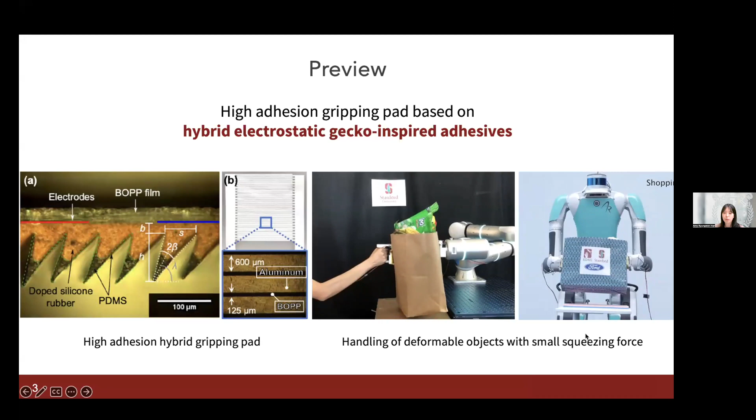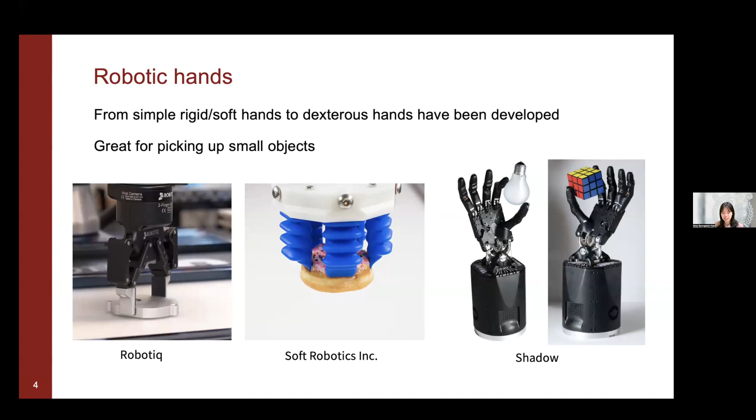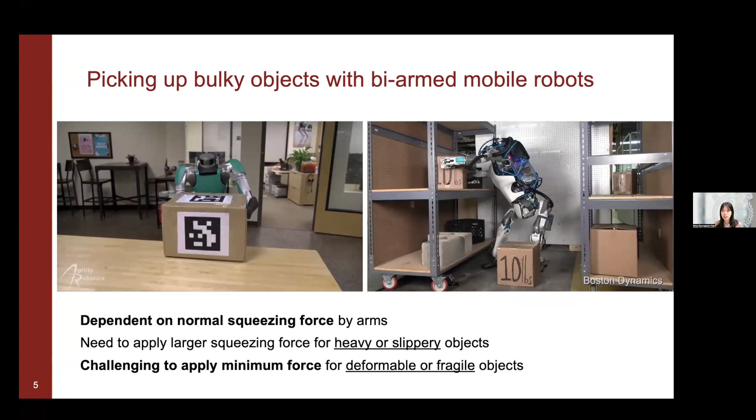There are numerous robotic hands ranging from a simple two-finger gripper to a dexterous hand, great for picking up small objects smaller than their hands. But when mobile robots pick up large objects, they often don't utilize their fingers, instead depending on squeezing force between their arms or palms. They squeeze even more when picking up heavy or slippery objects because they rely on friction, applying normal force to overcome the weight of the object.

If the weight is heavier, you have to apply larger normal force to increase friction. And if the object is slippery, meaning the coefficient of friction is small, you have to apply large normal force to overcome the weight. This means it's challenging to apply small force for picking deformable and fragile objects.

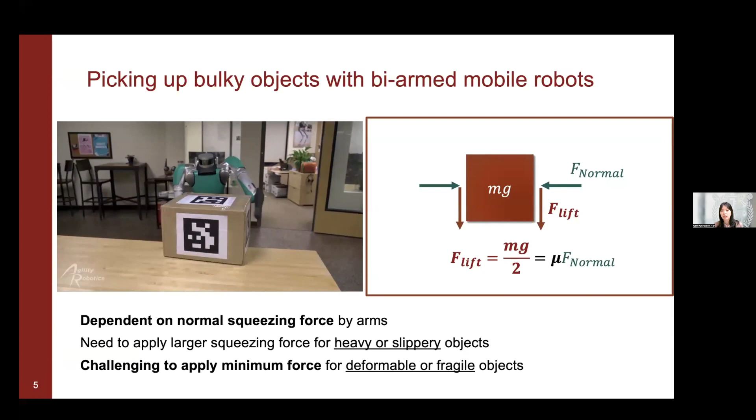So instead of relying on friction, we wanted to rely on adhesion. Our goal was to develop a controllable adhesive pad to reduce the squeezing force in order to handle deformable objects.

There are several solutions for enhancing adhesion. First is to use suction, which performs poorly on porous and rough surfaces, and the system has some weight and complexity. Electrostatic adhesion is more tolerant of surface roughness than suction, but the adhesion it generates is pretty small, meaning there's a limitation to how heavy of an object it can handle.

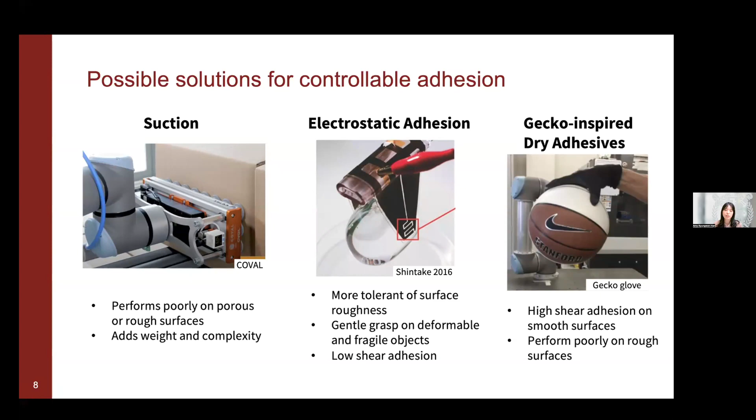Another technology is gecko-inspired dry adhesives. They can provide high shear adhesion on smooth surfaces, but only on smooth surfaces, so if the surface gets a little rough, they perform poorly. Our idea was to combine electrostatic adhesion with gecko-inspired dry adhesives so that the gecko-inspired adhesives also work on rough surfaces.

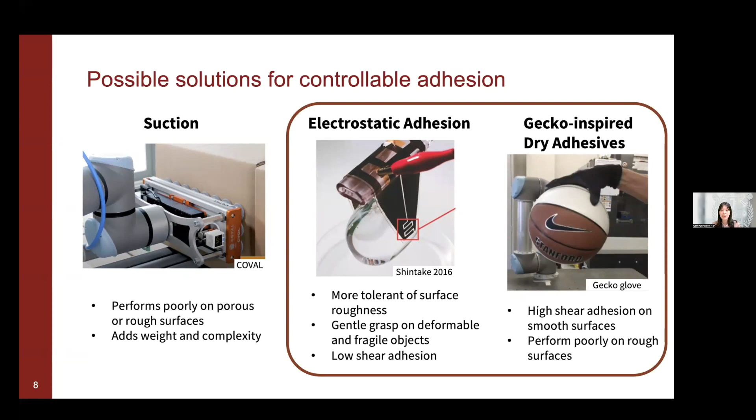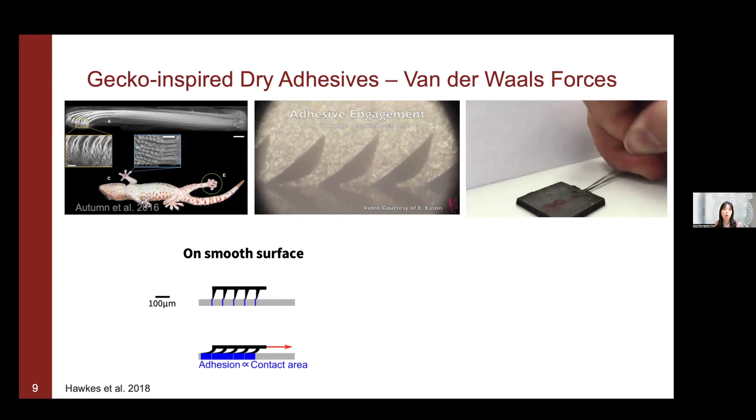But when they're pulled in shear or pushed from the top, the wedges lay over and the contact area increases. Because they have large contact area, they have large overall van der Waals forces, meaning high adhesion. When we let go of this force, the wedges pop up since they're made of silicone rubber, and the contact area decreases, meaning very little adhesion.

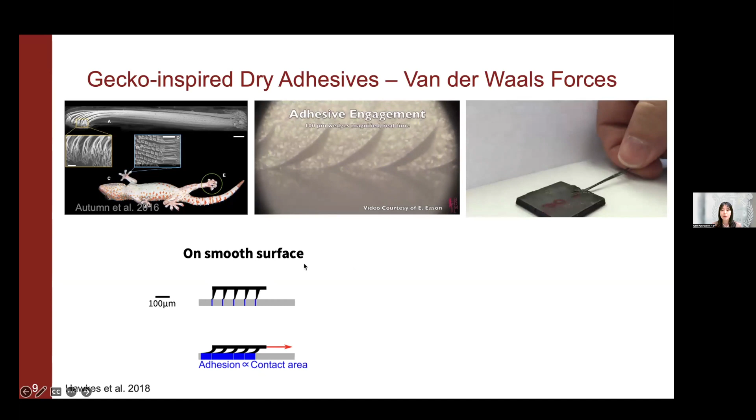So we can control the adhesion by applying shear force whenever we need adhesion. You can see in this video that when we're pulling in shear, we get very high adhesion, but when we let go of the force, there's barely any adhesion.

However, when the gecko adhesives are on a rough surface, you can see that a significant amount of contact area decreases, and again, less contact area means less adhesion. So what we can do is apply some normal force so that the wedges conform better to the surface, increasing contact area and therefore maximizing adhesion.

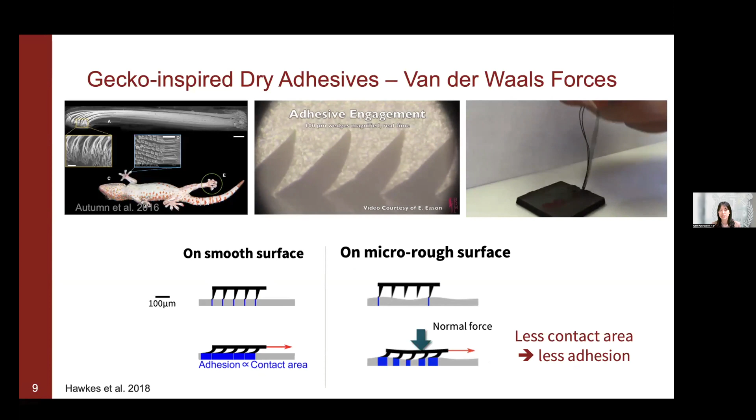So we wanted to use electrostatic force for applying this normal force. We combined gecko-inspired dry adhesives with an electrostatic adhesive pad. By applying voltages to the electrodes, opposite charges are induced on the surface of the object and attracted, and this electrostatic force pushes the gecko wedges onto the surface, maintaining good contact area.

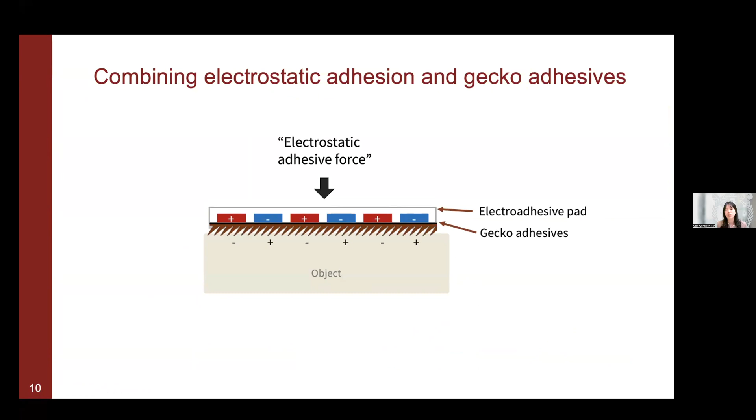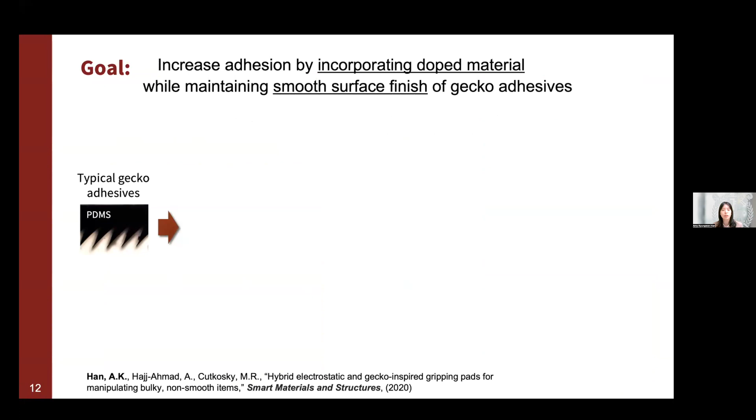So there have been groups who tried combining electrostatic adhesion and gecko-inspired adhesive, and we wanted to further increase the adhesion by incorporating doped material and maintaining smooth surface finish of the gecko wedges. So from this typical one-material, PDMS gecko adhesive, we developed bi-material hybrid pads.

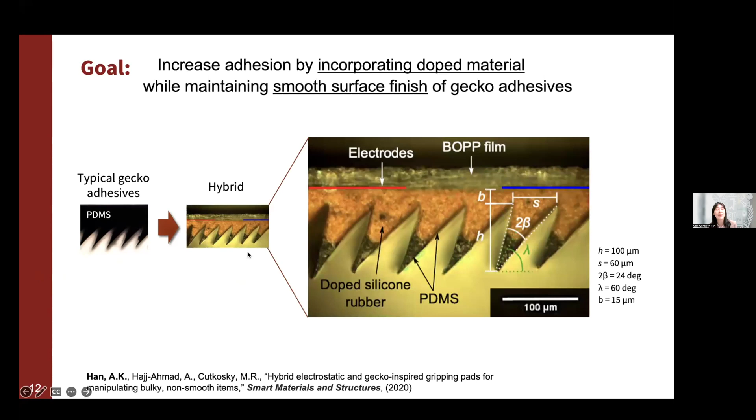There are three features of the hybrid pad that improve the adhesion. First, we optimized the pattern height and found the pattern, the gap, and the electrode width that gave us the highest adhesion by doing a COMSOL Multiphysics simulation.

Second, we doped the silicone rubber with a high dielectric constant material, and by doing that, we were able to further increase the electrostatic force. This is important because it means that given the same voltage, we can get a much higher electrostatic force.

Lastly, instead of doping the entire gecko wedges with the doped material, we left the tips and the surface of the wedges to be PDMS. That was important because we were able to maintain the good surface finish and sharp tips of the gecko wedges, as you can see in this microscopic picture.

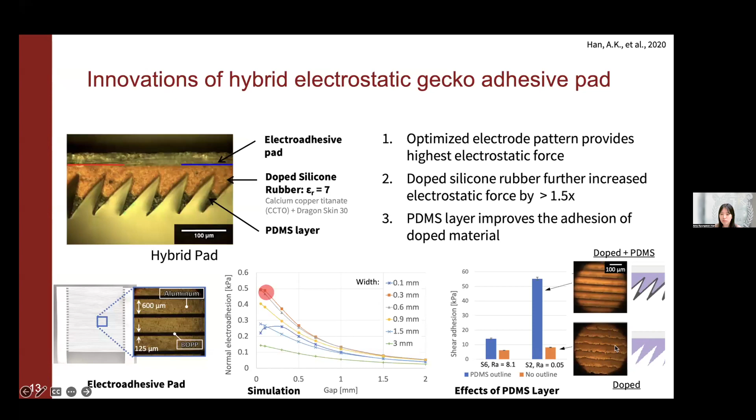This is important because you have to get very close to the surface and maintain good contact area in order to maximize the van der Waals forces. So you can see that compared to the completely doped material, which has a rough surface, the adhesion was much higher.

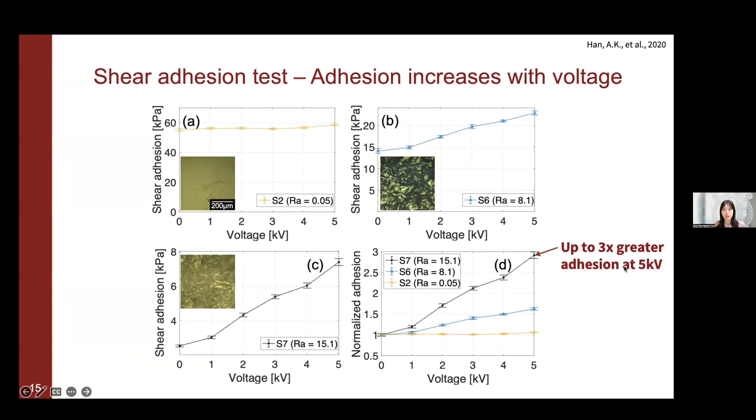We tested at different voltages and different roughness surfaces, and we were able to get up to 3 times greater adhesion by applying electrostatic adhesion compared to just gecko-inspired dry adhesives.

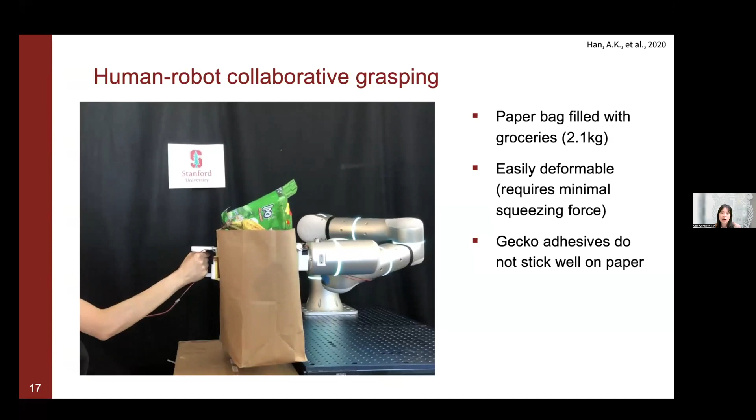We tested a human-robot collaborative grasping task on a paper bag filled with groceries. This is difficult to pick up because it's easily deformable, and gecko adhesive doesn't stick well on this paper. You can see this close-up video of the electrostatic adhesion in action.

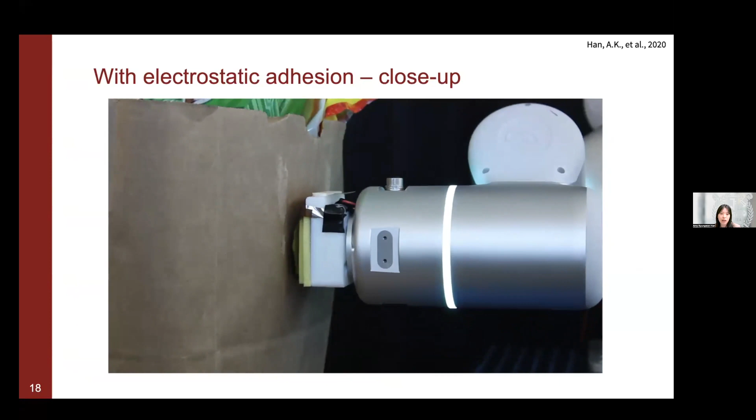You can see that even though the initial contact area was not great, the electrostatic pad clings onto the surface and maintains good contact area. We were able to decrease the squeezing force by half.

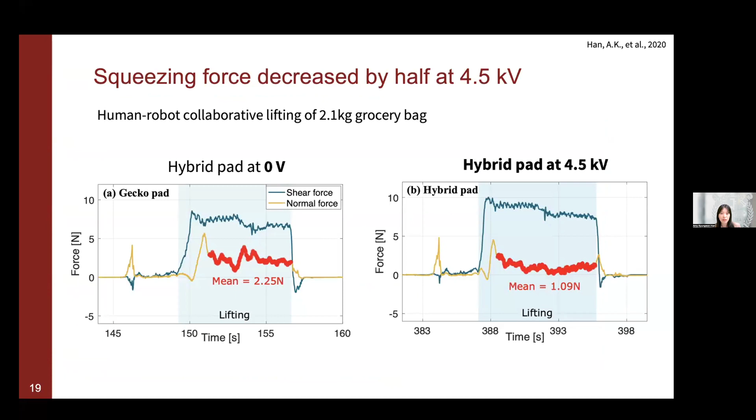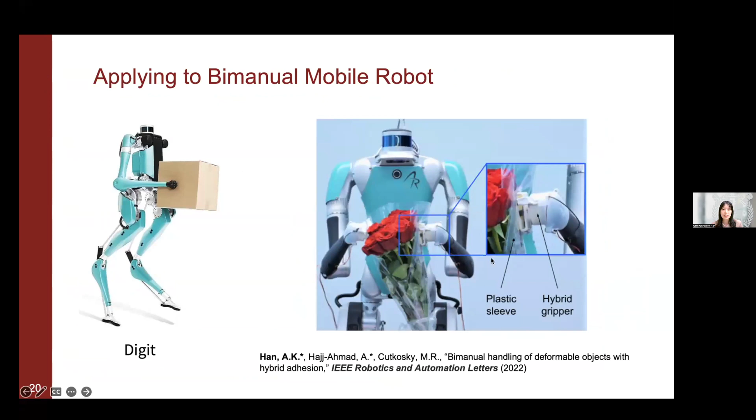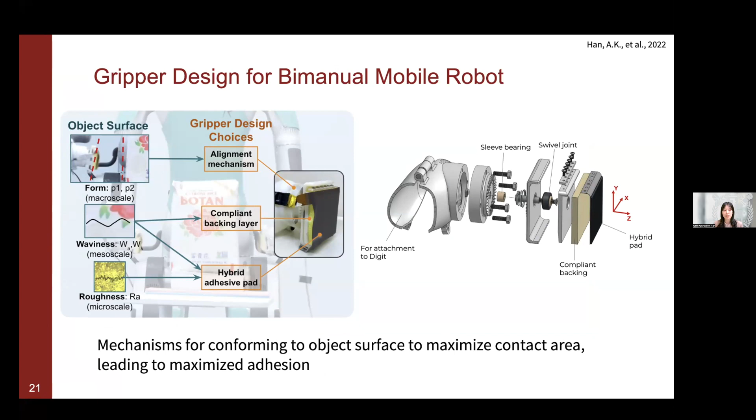Moving on, we also applied this to a bimanual mobile robot, which had less control of the squeezing force. We designed a gripper for this Digit robot, incorporating different mechanisms to conform to the object surface at macro scale, mesoscale, and microscale. We were able to maximize the contact area, meaning we were able to maximize the adhesion.

We tested the gripper on different roughnesses and measured the squeezing force. For this testing, we didn't compare it with Digit's bare hand because the bare hand wasn't working well, so we covered it with neoprene to make it better and compared that with our hybrid pad.

Even so, we were able to get up to 10 times smaller force when using our hybrid pad, utilizing electrostatic force and gecko-inspired dry adhesives, compared to a Digit hand covered in neoprene.

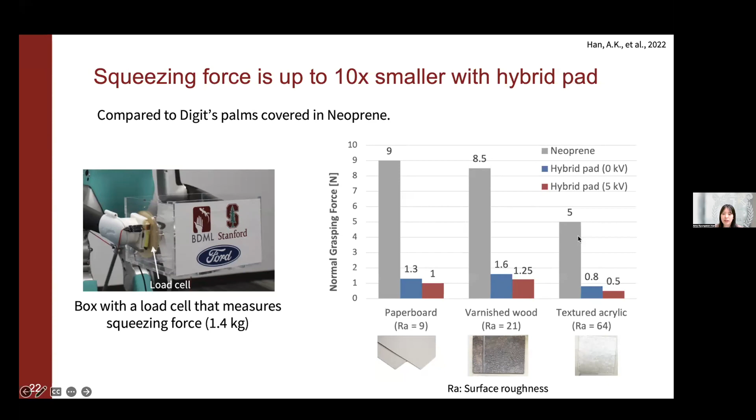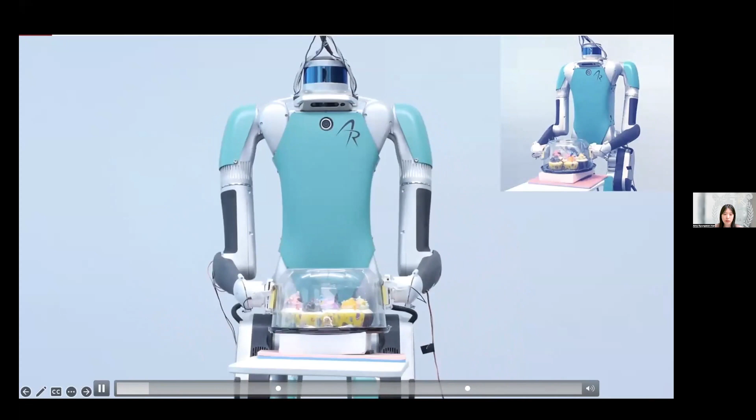This is a video of the Digit robot picking up objects. I'll skip to the main part.

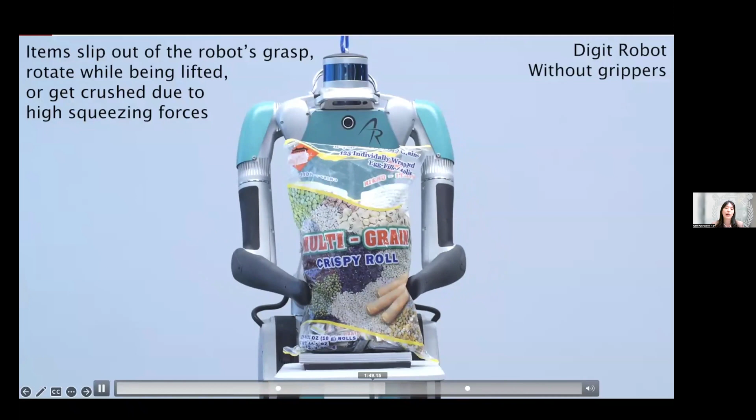This is the Digit's original manipulator. We didn't even put the neoprene here, and you can see that it's really not great at picking up slippery objects and deformable objects.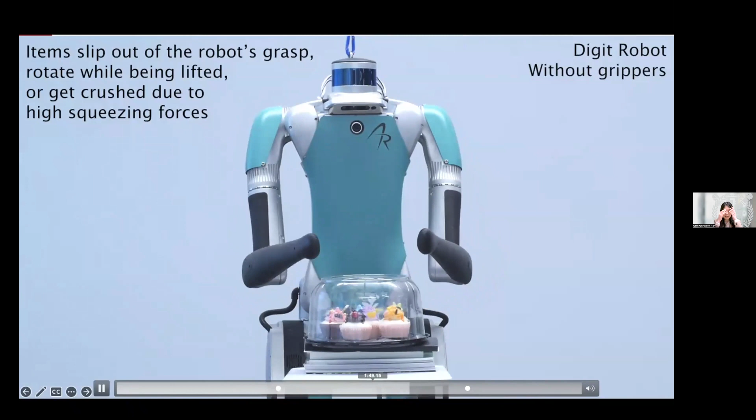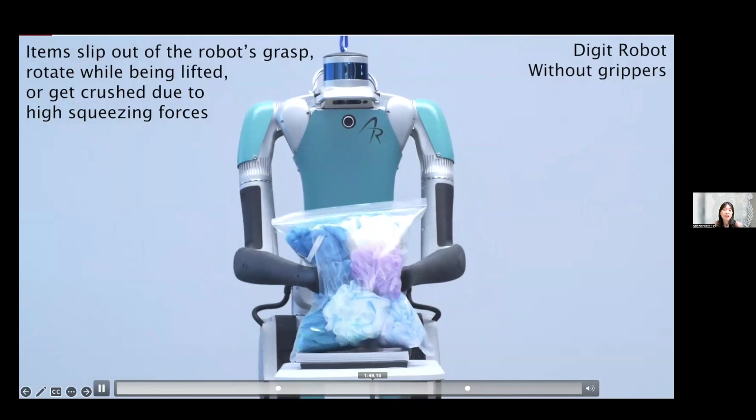We control the distance between the hands, then decrease the distance until the robot was able to lift the object off from the surface. You can see that even if it deforms a lot, it ends up slipping off from the hand or rotating from the hand.

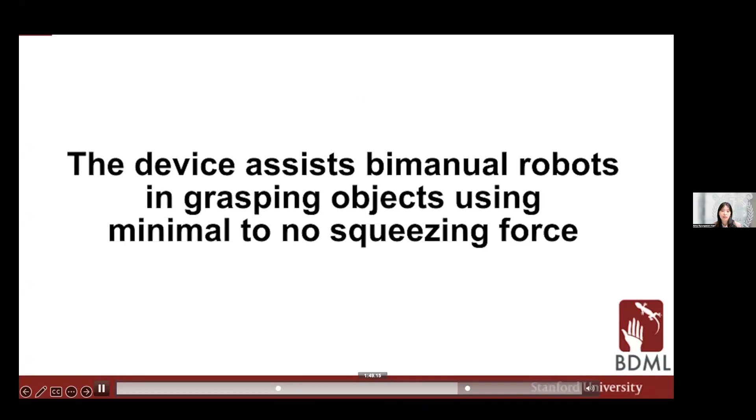But with our gripper, the hybrid gripper, we were able to reliably grip the same deformable objects, and even a bag of rice.

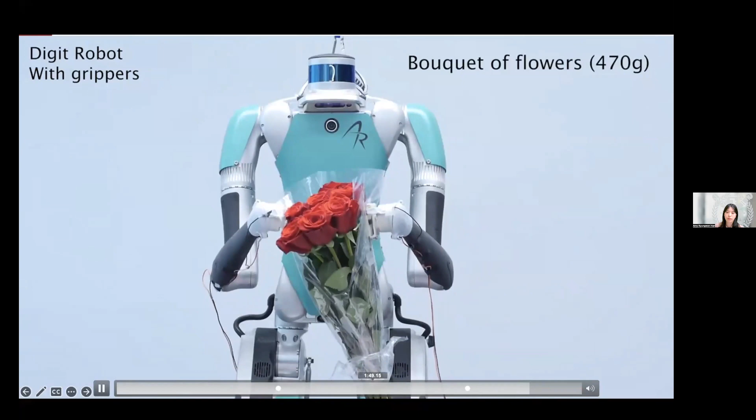Thank you very much. It was very, very impressive to know how the gecko-inspired mechanism can be implemented in the robot. Thank you so much. Okay, then let's move to the next...